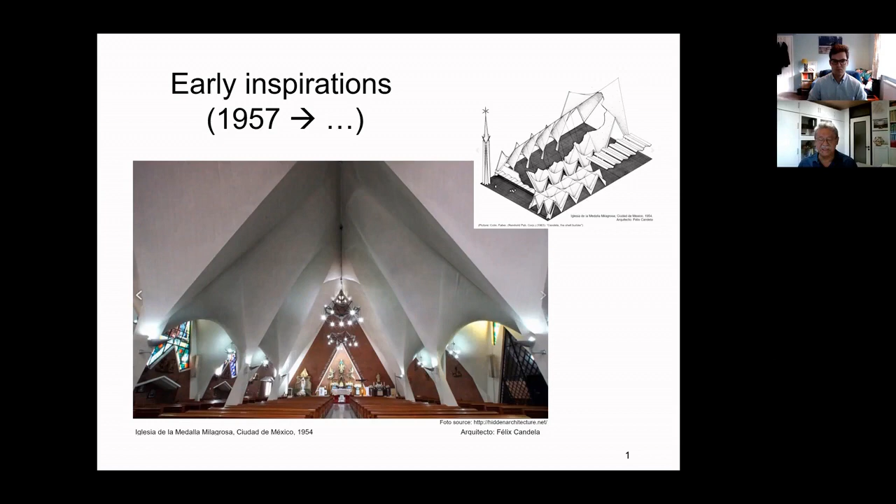Some 10 years later, I came across this book at the top right-hand side, the Wizard of the Dome, the Spanish version of the book about the geodesic domes of Buckminster Fuller. And that's when I decided I want to do this, I want to work on this area.

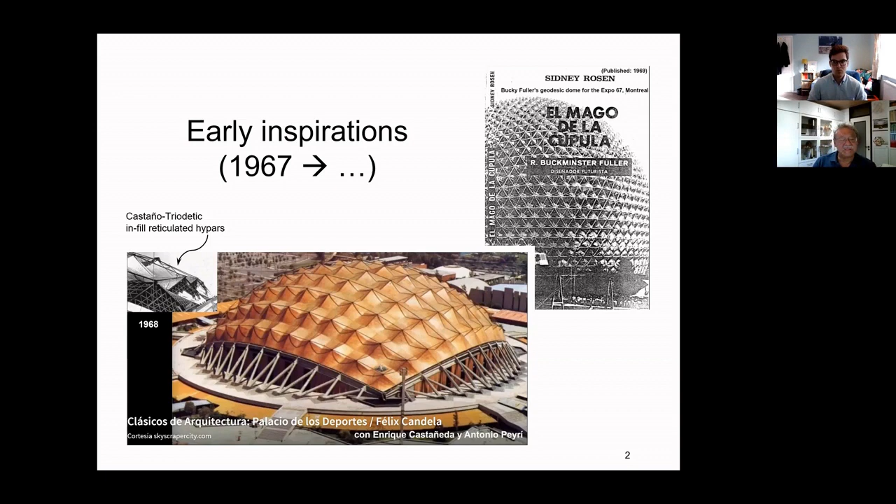More or less at the same time, this beautiful dome, designed by Felix Candela, Castañeda, and Peyri for the Olympic Games in Mexico, was also a very clean and splendid example of an advanced type of structure. It was a grillage of circular, double chord circular arches, and in between the infills were realized in this Castaño triodetic single layer reticulated hypars.

That's what decided my way into the architecture and design of these structures. I was very interested in geometry and shapes. I also wanted to learn about the engineering of it, but geometry is what pulled me into the field of architecture. That's when I would like to focus in this middle part of the interview on the geometry behind the spatial structures.

Being a geometry designer, I would almost say spatial structures are equal to geometry. Of course I know this is an oversimplification, and some engineers would say, what about structural analysis, what about materials and some other things? But I think one of the cores or the basis of any spatial structure is geometry. I will go through a short review of the geometry of spatial structures.

Here we have regular space structures, and many of these regular space structures have very simple normative principles, or principles of growing. For instance, MERO based some of his normed space structures on a geometric series based on the square root of 2, because that gave a lot of regularity and a lot of combinations having a minimum number of components. The picture at the bottom shows a pedestrian bridge built at the beginning of the 40s, built with normed components.

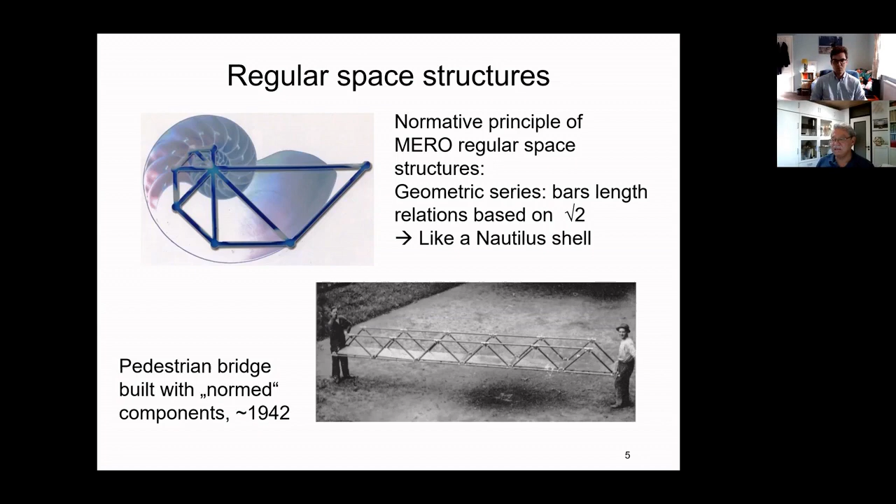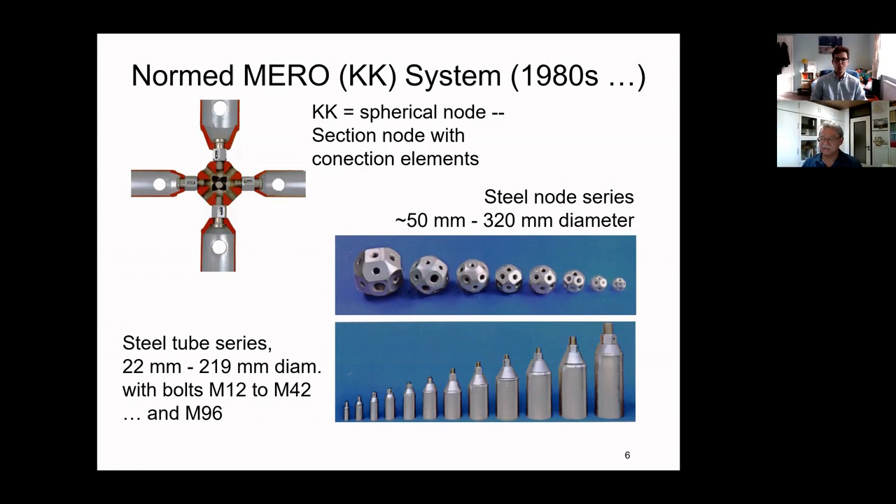From that time, and for the next 80 years, many people have been building space structures with these normed components. By the 1980s, this is the collection of components of the MERO system. There were very small nodes and also very big nodes, very small bars, very large sections, so you could combine it to design and generate small structures, middle-sized structures, and large structures.

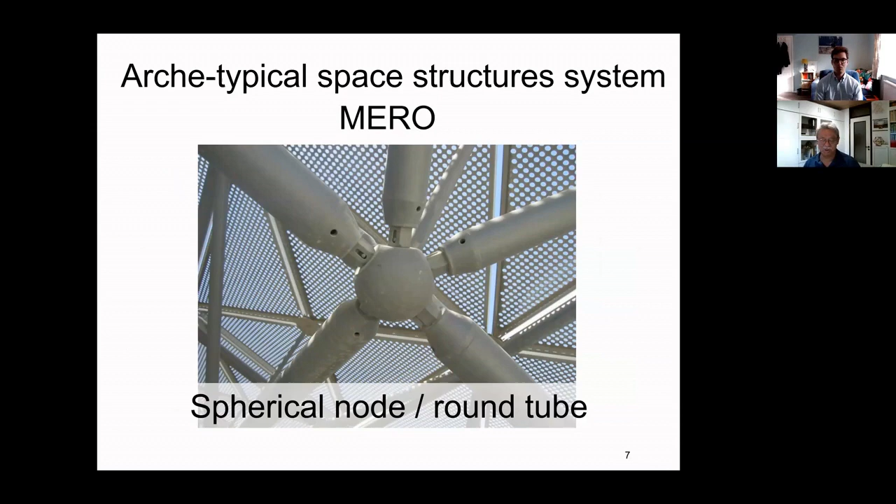If you connect these elements, they look like that. Many people are familiar with this type of connection of space structures. MERO is the archetypical space structure system. For many years there were many copies or clones of this system all around the world, the spherical node and the round tube. One characteristic of these regular space structures is that the angles at the nodes are fixed values, so they can be produced in series, and you can build and design many types of configurations.

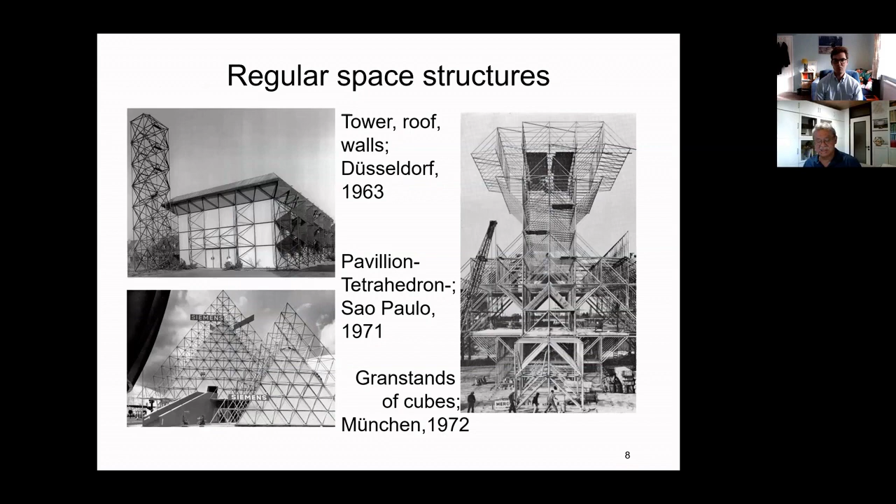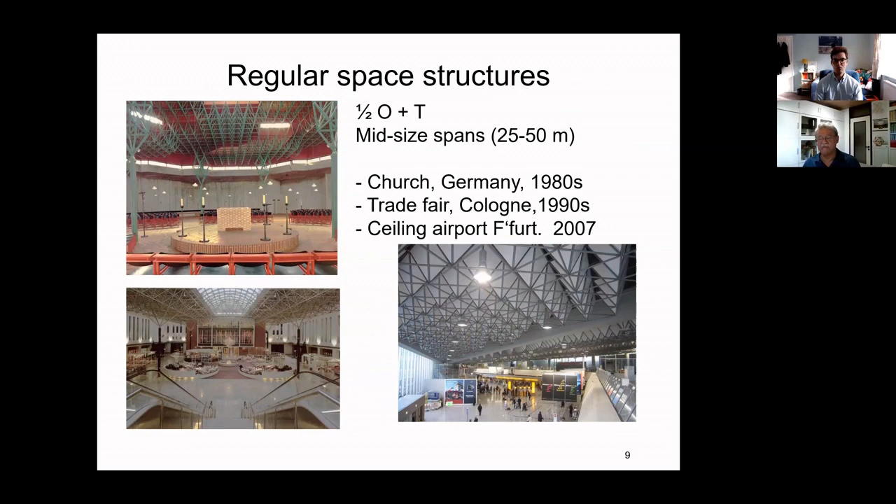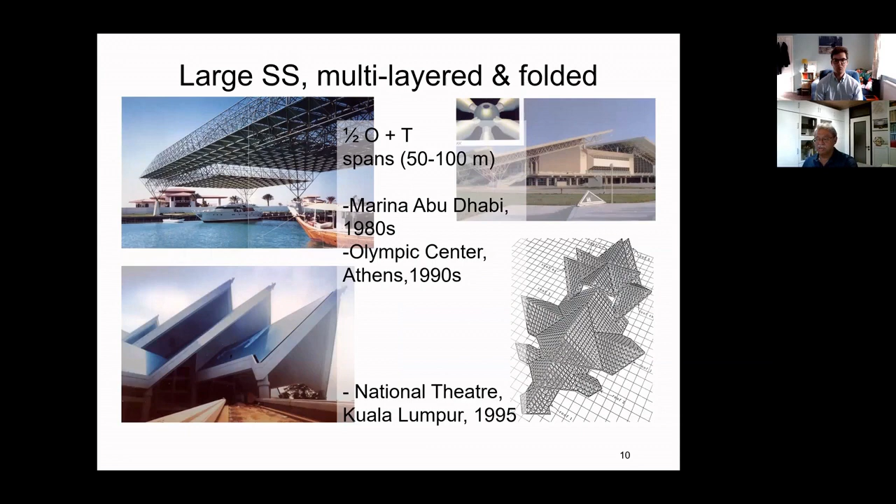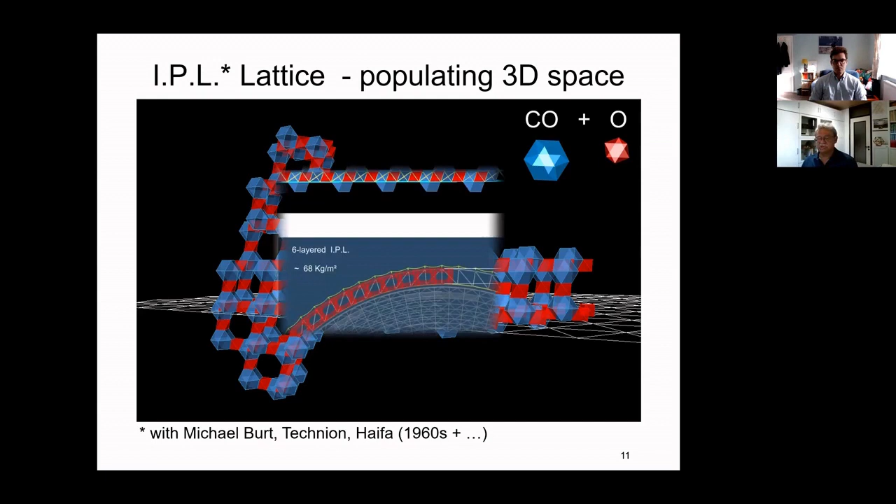Even looking into the future, populating 3D space with just a few components offers infinite possibilities of building interesting space configurations. This is an exercise we did in connection with Professor Michael Burt of the Technion in Haifa, who started his research in the 60s, and we also tried to apply his ideas for real structures.

In this case, we are taking a slice of this infinite polyhedral lattice, a 6-layer system, and making a comparison with a conventional steel truss system. From the difference in weights, here 102 and 68, only 68 kilograms per square meter, with a span of almost 300 meters, you see it's about 30% savings with this ultralight space structure configuration.

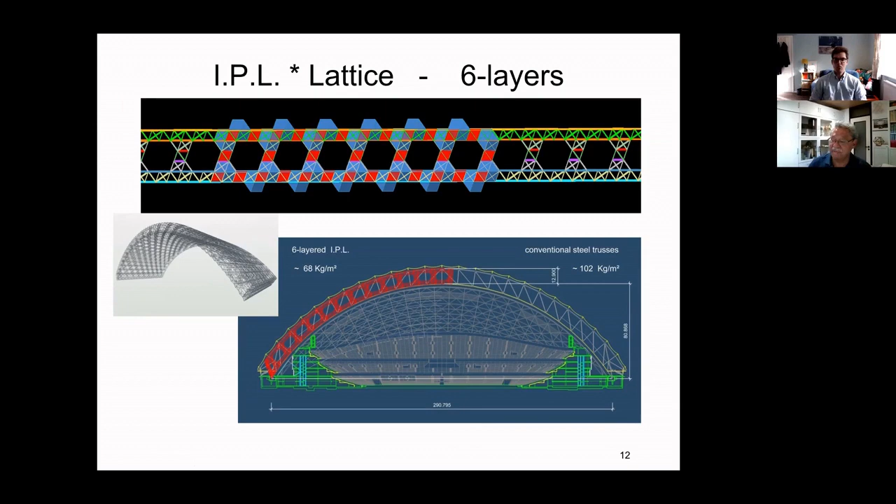And this is a very regular system. Summarizing the regular space structures, the more regular, the better. The target has been to obtain the minimum number of line lengths, node types, angle combinations at the nodes, and panel types.

On the left-hand side you see some well-known space structure configurations. In the top row, in the middle, you see the square on offset squares 2-layer grid. I mention this because I think more than 80% of the regular space structures in the world have been built with this geometry. Later you will see why.

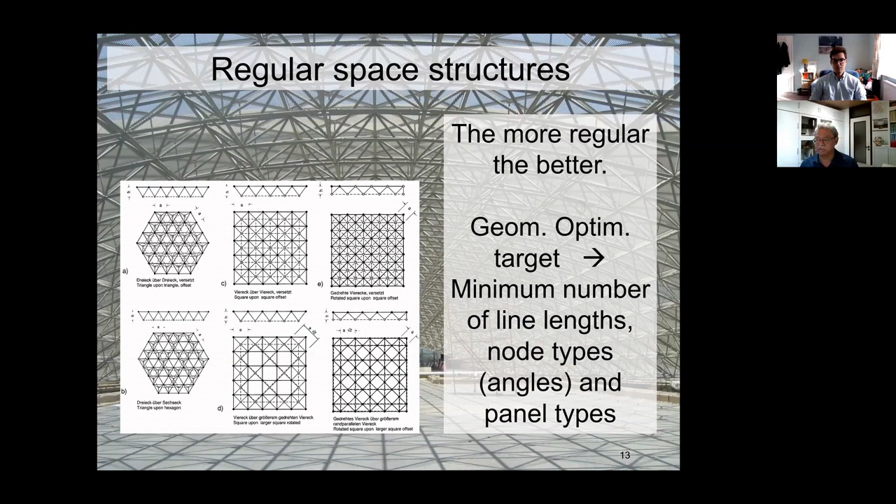By the end of the 70s, Mero had already automated greatly its production and technical processing. We were going parametric already, doing automatic dimensioning of tubes and nodes, including interference checks, parts list generation, generation of data sets for NC machining and drilling, and automatic generation of assembly drawings.

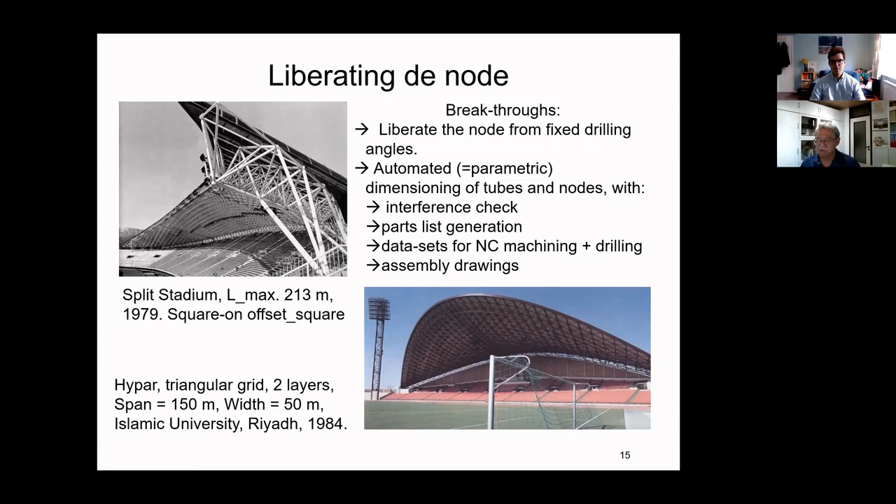And this is a breakthrough project: the split stadium from 1979 with 213 meters span. By the middle of the 80s, this kind of large, complex structures, as this hypar dome on the right from Felix Candela, were a matter of routine for Mero with the spherical node and round tube system.

With almost this system, Mero built a lot of domes. One of the outstanding domes, which you know very well in the UK, is the Eden Project in Cornwall. That was a Millennium project.

As you can see in the top picture, it consists of 2 sets of 4 interconnected geodesic domes. In this project, it was the first time that the hex-tri-hex grid was applied on an icosahedral system. The architect had designed the envelope of these domes with hexagonal networks.

But after a feasibility study, we found out, together with Anthony Hunt, the structural engineer, that the more efficient way of building these huge domes was a double layer system. We found a geometry that has this hexagonal grid on the surface and a semi-regular bottom chord layer of triangles and hexagons to stabilize the whole system.

The largest dome is very large, it's 120 meters in diameter. The largest hexagonal cushion has 70 square meters. That's like a dwelling almost.

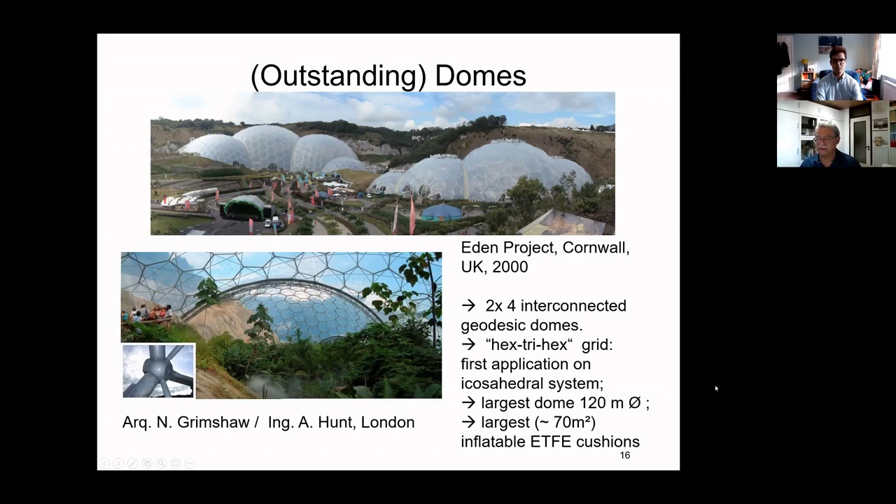Also, new requirements sometimes require new nodes, like the one here on the bottom left, and this provides more stiffness to the connection. Up to here, Mero had designed a lot of structures on spherical surfaces.

Most of them were analytical surfaces. But at this time, architects were also designing free-form surfaces.

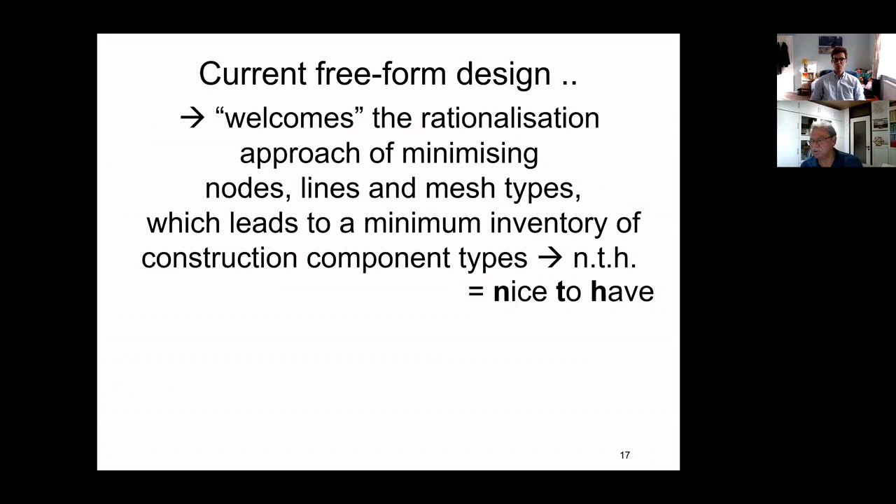Current free-form design welcomes the rationalization approach of minimizing node lines and mesh types. This is a feature which is nice to have, but not essential nowadays due to all the advances done in digitalization of design and production. But it's nice to have if you have just a few components.

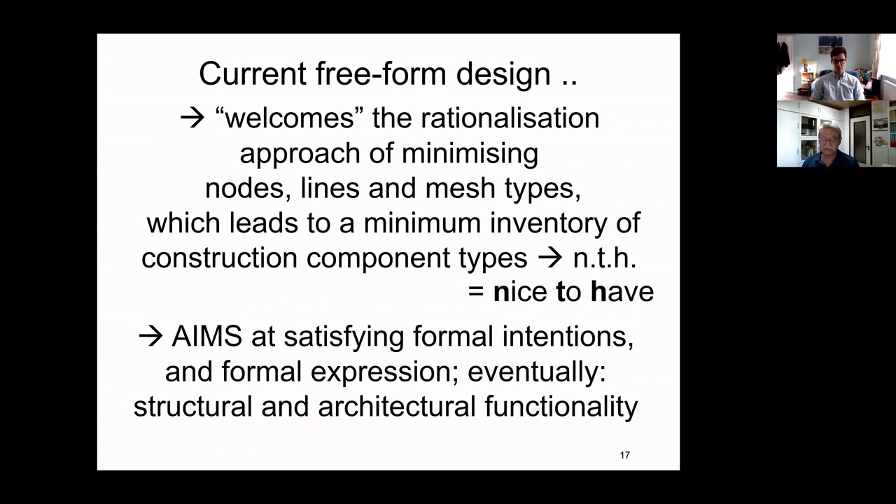Current freeform designs aim more at satisfying formal intentions, interesting forms, formal expression, and eventually also satisfy structural and architectural requirements. The next project is the Esplanade freeform hulls for the Art Center in Singapore.

That was the first very large freeform project for Mero. We were also trying to keep up with the technology and make the systems more elegant. Here above on the right-hand side, you see a view from the internal foyer.

And here is what the company needed to integrate the structure: the two-layer space frame with the glazing and the aluminum sunshades in one integral system for roofing.

Down on the left, you see the finished product. By the way, the length of these halls are about 120 meters, 60 meters wide, and 25 high.

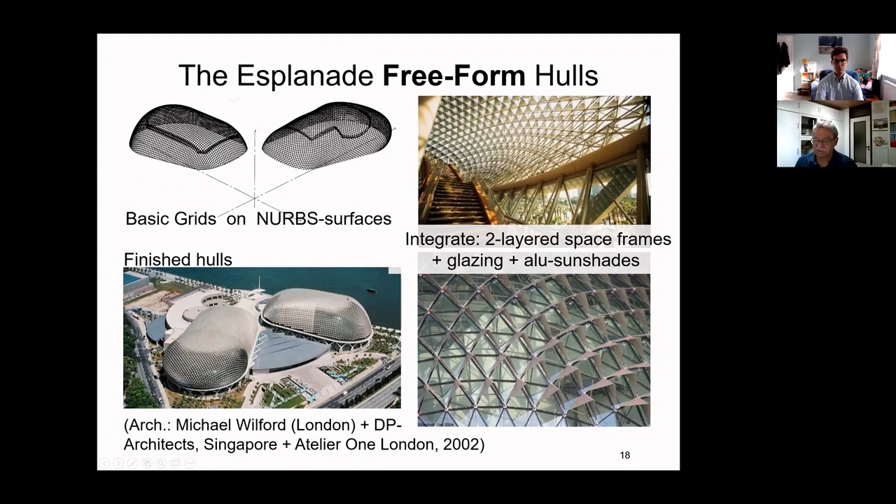Top on the left, you see our raw material. That's what the architects and the engineers gave us to develop the two-layer structural grid. At that time, we were also systematizing all possible features.

The systems were getting more and more complex and larger. So, for instance, in this case, we generated the whole bottom chord and the diagonals with a program based on the duality principle. On the right-hand side, you will see a mock-up of the resulting geometry. The basic grid had a constant length of 1.5 meters and a structural depth of 90 centimeters.

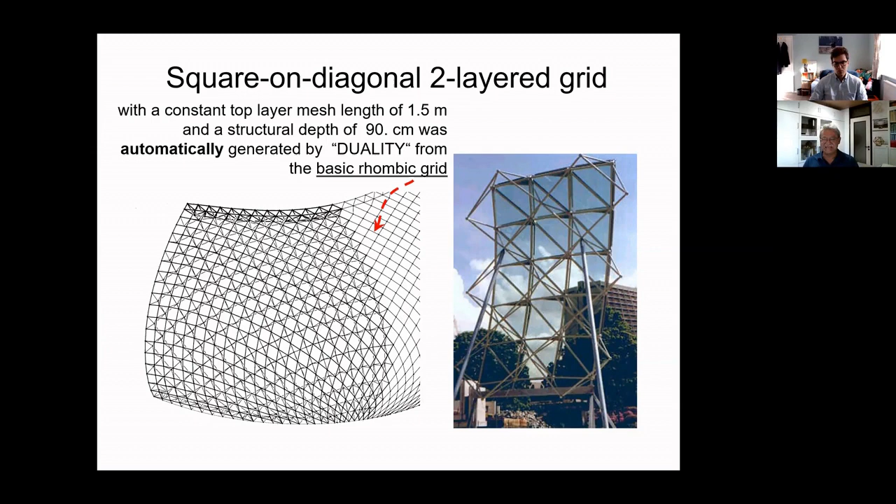At this stage of tools development, around the year 2000, we also started to extend the geometry model with other attributes, like point colors and point symbols. In this way, we could group the nodes of the surface of these halls and create this patchwork, which is a map of the pressure coefficients of wind for a certain wind direction.

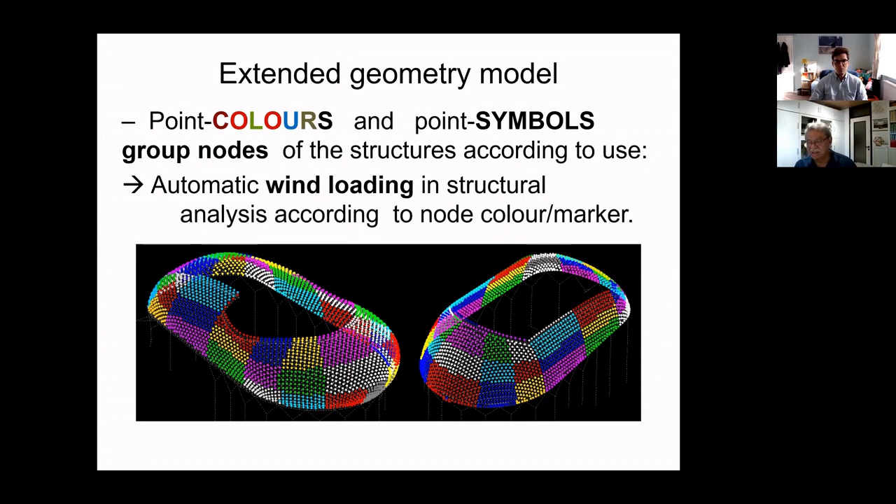With this approach, we could implement the automatic generation of wind loads for these two halls, for 12 wind directions, for every node, in an automatic way that fed the structural analysis program.

From the construction point of view, also around the year 2000, we started to use normal vectors at grid nodes, normal to the curved surface, and normal vectors at the middle of the lines, for the purpose of positioning and orienting the construction components.

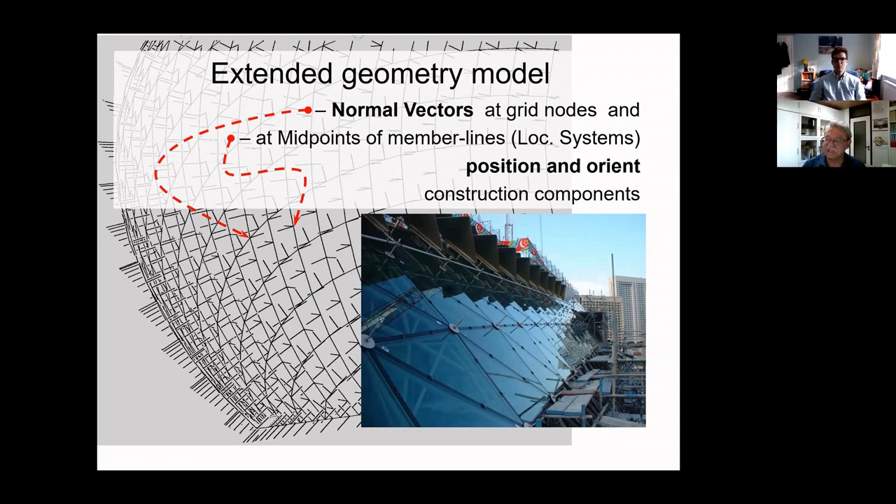In particular, normal vectors at the nodes were used to make offsets of the nodes to create the subsystems of the complete roofing system. The top chord was offset to generate the glazing grid, and with a further offset, the secondary grid for the sunshade substructure was generated. Nowadays, I think these are some sort of standard features to design and construct these free-form space structures.

Other designers were going another way. Here, Maximiliano Fuksas, in 2004, developed this free-form, very long structure, 1.3 kilometers, which for construction reasons had to be divided into 12 segments of about 80 to 100 meters, the width varying from 40 to 30 meters, and the height from 0 to 16 to 25 meters.

Almost half of the surface of this front surface is flat, so we had to re-engineer these flat surfaces to get low and high points, and the drainage was done at the low points.

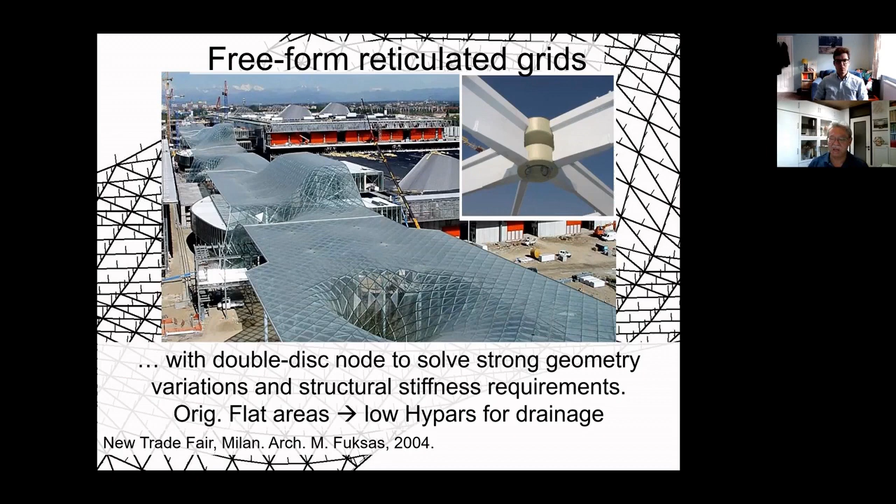Also, these flat areas require bending stiffness. The sections have to be high, so Mero developed this double-disc node to cope with this structural requirement.

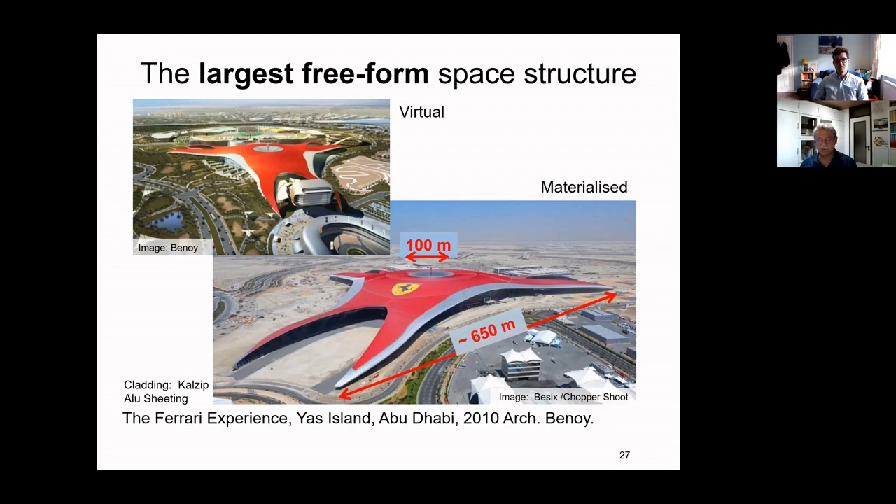Other architects were looking at the limits, how far or how big can a space structure be, and Benoy designed this extraordinarily large envelope for a leisure park in Abu Dhabi. Up, the virtual image of the architect, and down, the materialized roof. 100 meters, the hole in the middle; 650 meters, the distance between the two corners of this roof.

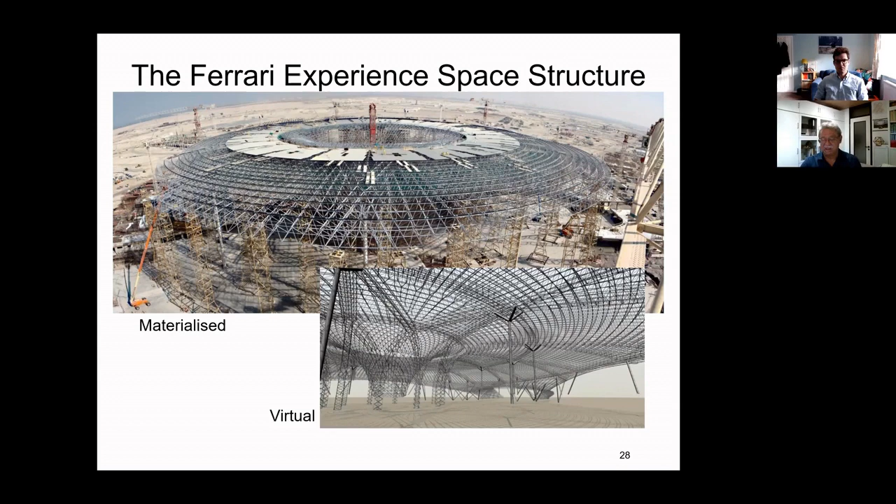We were always reaching the limits of many programs. Many programs had to be extended to cope with this huge amount of information, to be able to do the structural analysis and also to implement the construction. Even renderings, like this one, required many hours to be calculated.

There are some numbers, we'll skip them. I just want to show that the roof has 200,000 square meters of roof surface, more than 32,000 spherical nodes, and more than 125,000 round tubes. And the whole process of design up to the last stage of construction took only 1.5 years.

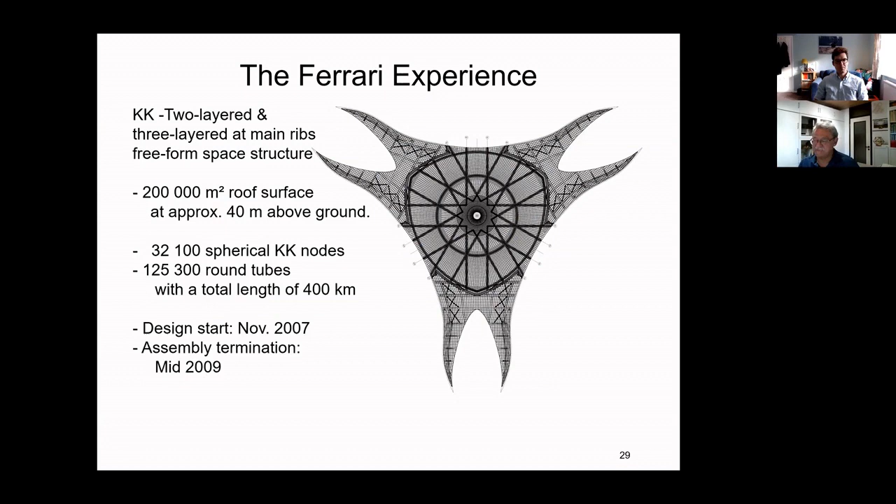One aspect that we hear nowadays concerning freeforms is the optimization of networks. But is it possible? Well, I'll make an oversimplification again: no, if the structure is going to be built, especially if you have a very strong interaction with other architectural elements, like in the case of this splendid design by Zaha Hadid.

One important requirement of this design was how the paths of the cladding seams, outside and inside, run parallel to a certain direction to suggest flow movement and smoothness.

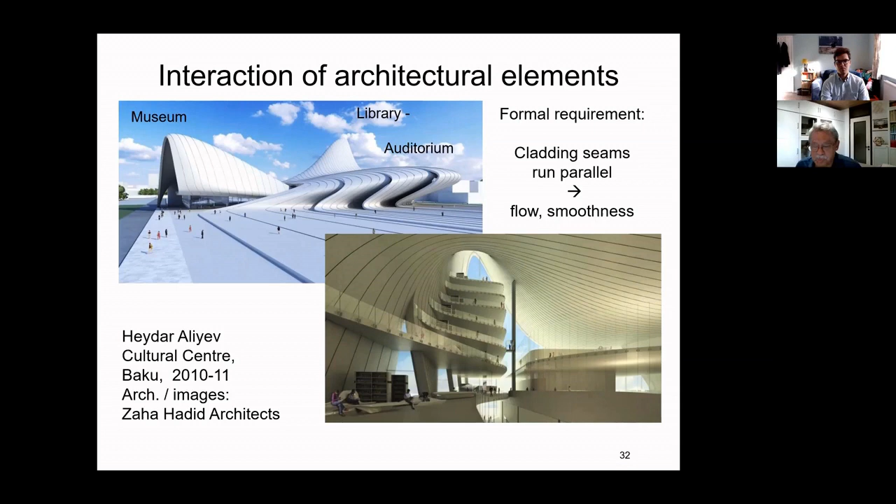But how do you support these skins? There was, of course, a period of evaluating structural systems, and at the end, the space structural system—especially this geometry, square and offset square, in combination with spherical nodes and a tubular system—won this competition. It was because this geometry, with this type of connection, allows you to approximate almost any geometric shape.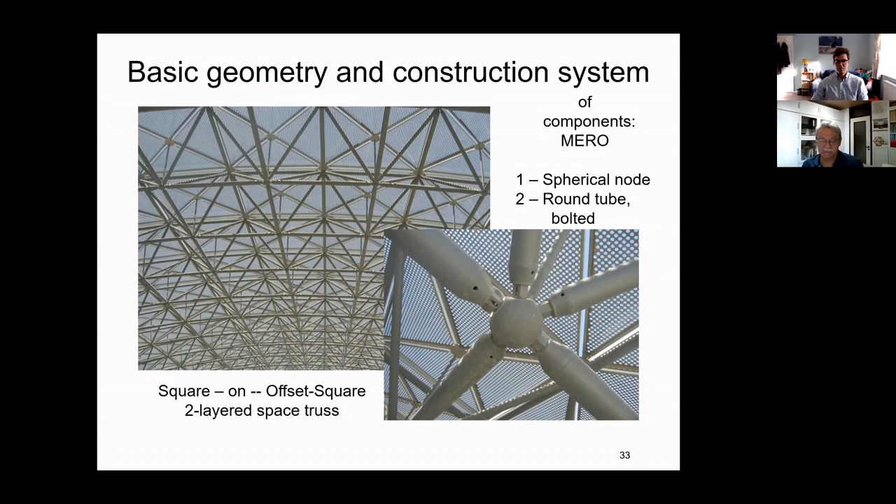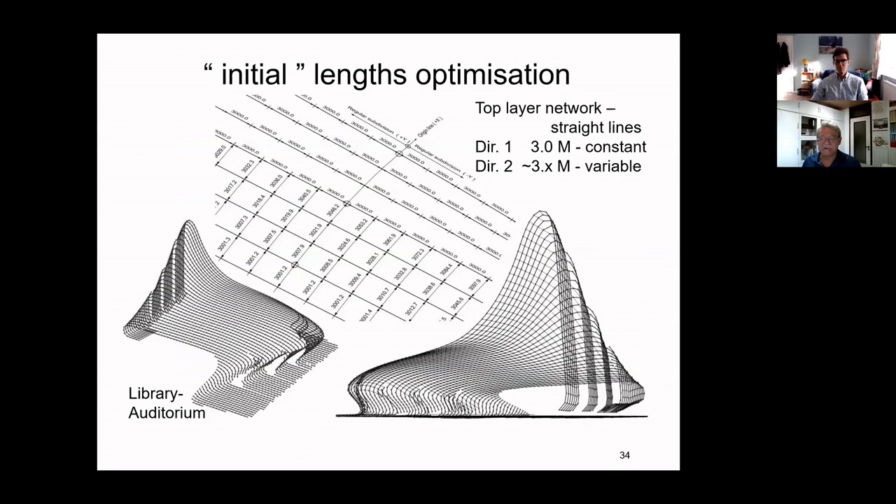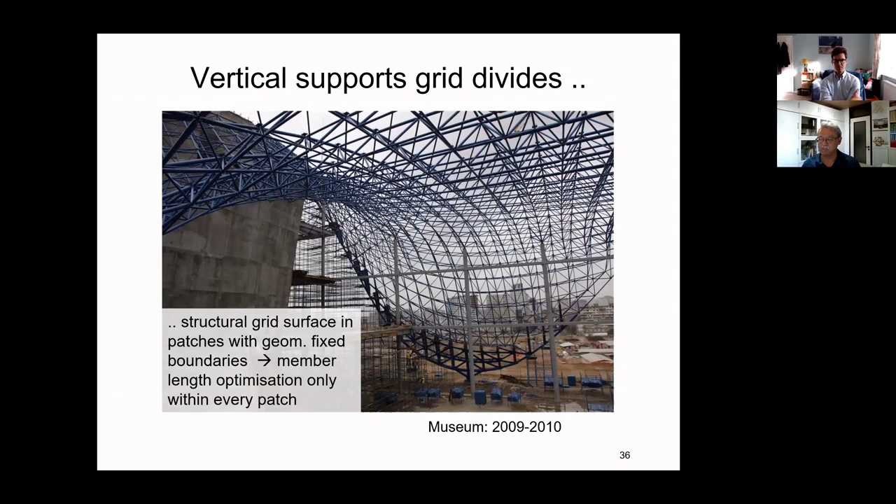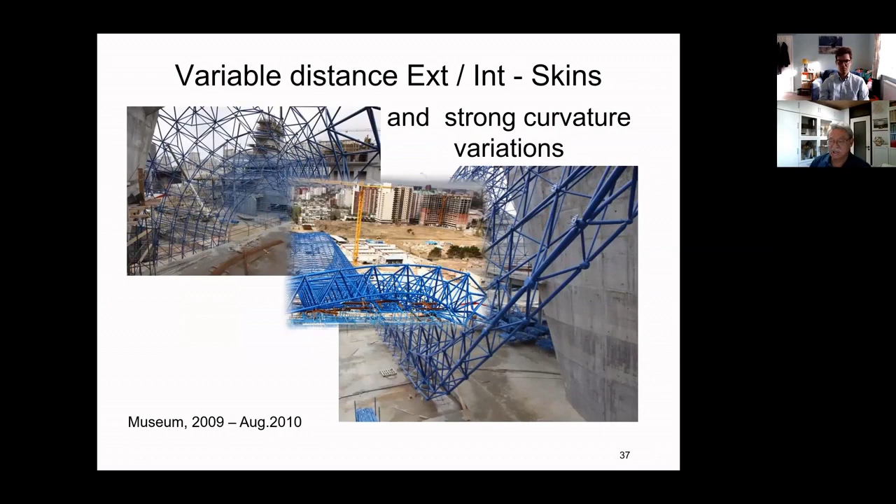We have an initial length optimization. I won't go into the details, because we couldn't apply it to the whole surface, since the structural grid of the columns inside had another module and divided the surface into patches. So we could only apply our optimization strategy within these smaller patches, which was a bit more work. Also, the variable distance between external and internal skins and the strong curvature variations didn't allow us to minimize the types of nodes. It was really impossible.

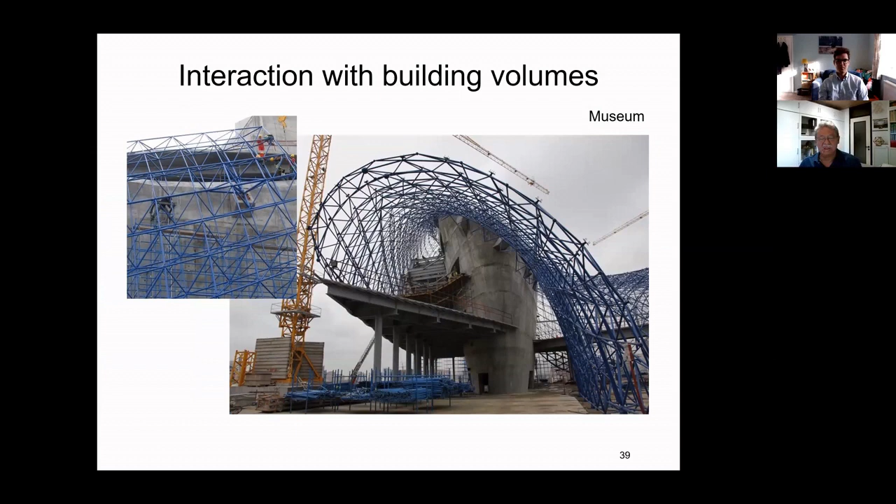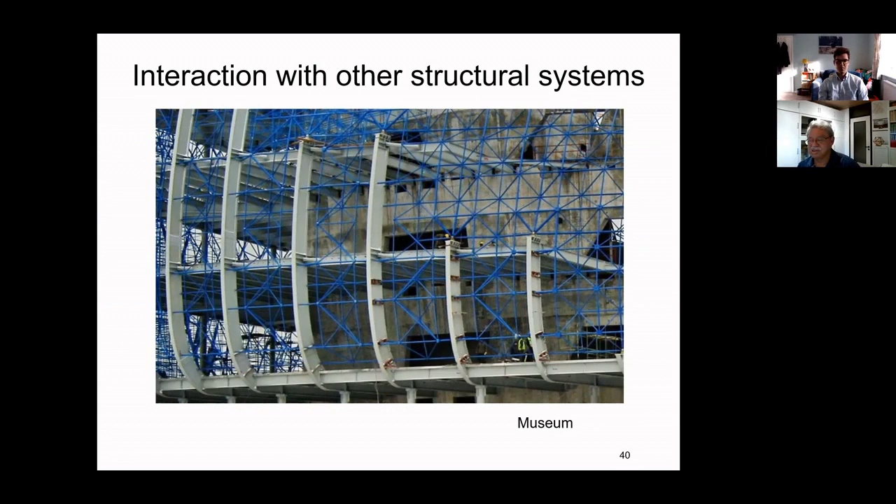The interaction with building volumes, like supports positions in the top, in the lower core, they force you to come with your polylines also going through these fixed points. Also interaction with other structural systems. We were happy that we could weave in between these supports to be able to guarantee the support for the cladding.

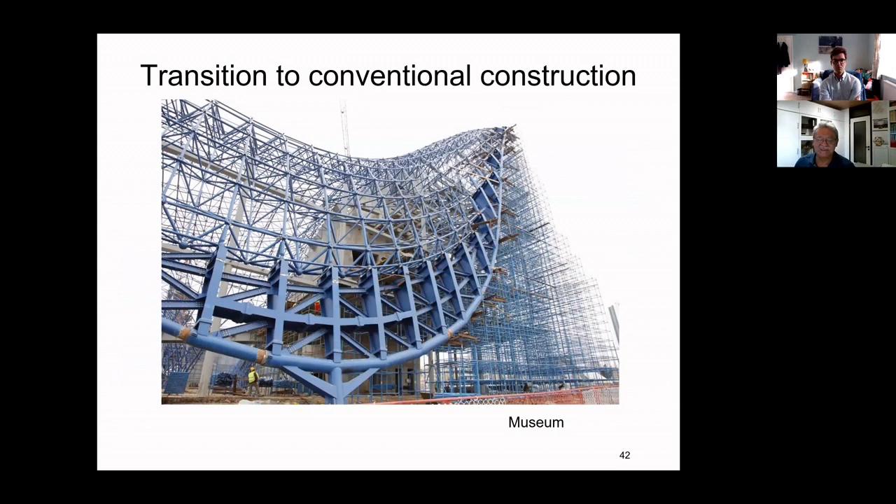Also the transition to conventional construction when the space frame system couldn't be applied anymore. Also like in this part of the museum where this point at the bottom is supposed to touch the floor tangentially. But it's a very massive tangential point because it's a support point where very heavy earthquake loads had to be taken, also wind loads.

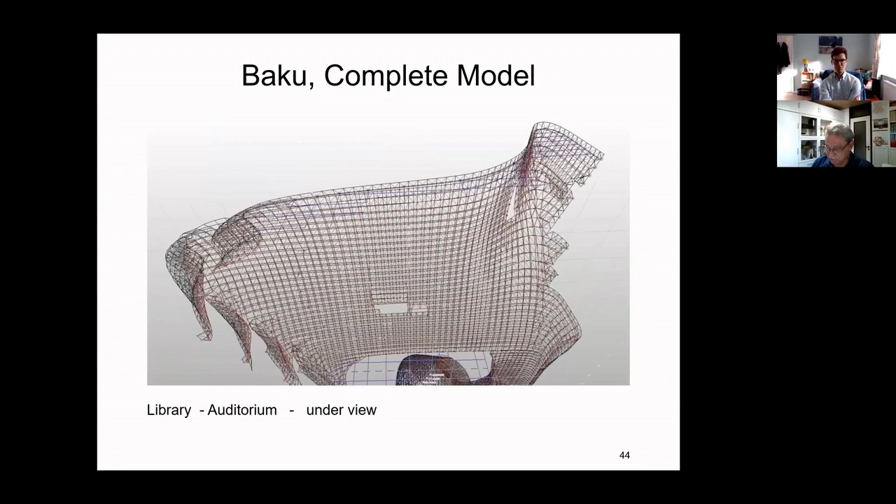So there was a certain little contradiction with the architectural design. In the end, we had a complete model of this splendid design, and that was the basis for the structural analysis, the construction detailing, and planning the erection of it. And you see it worked because this is a photograph of the real space structure.

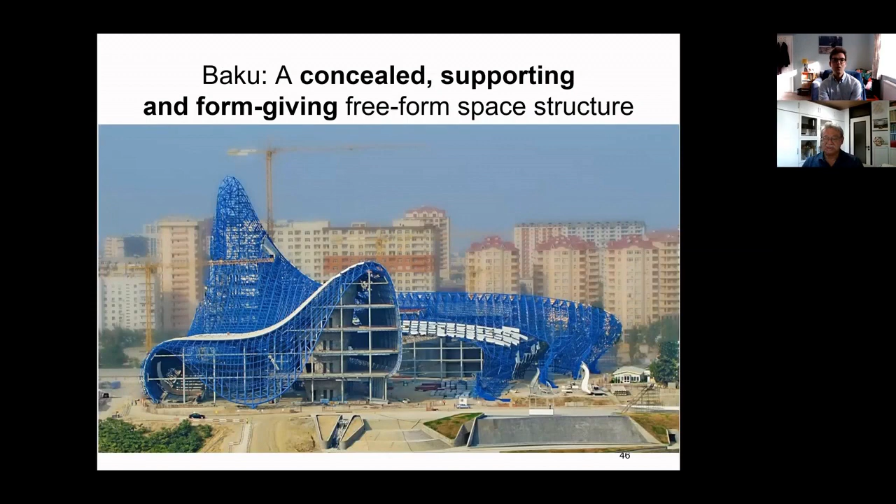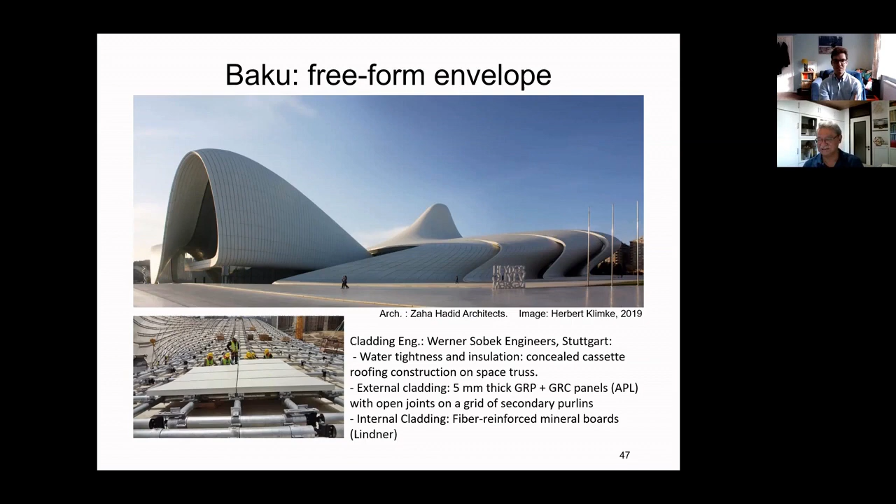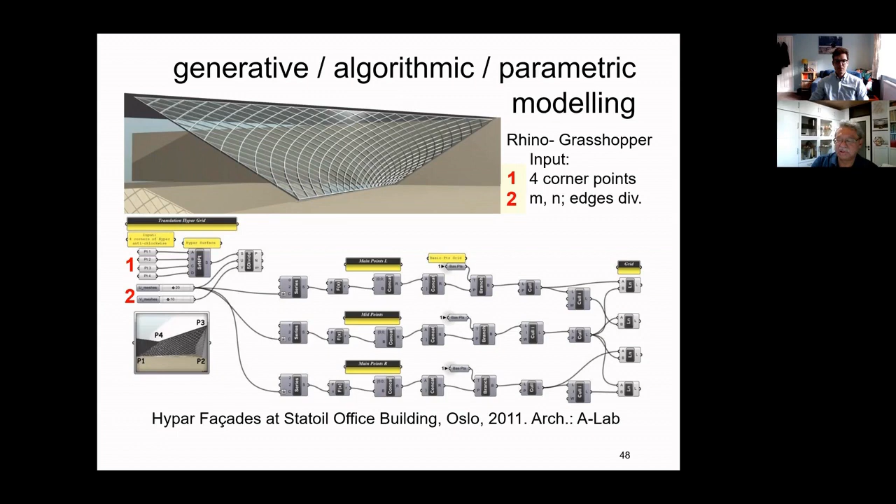That's an addition to Rhino, which is a program for modeling and designing free forms. In this case, you only give four points in the model space and the subdivision numbers in the two directions, and it delivers you this structure.

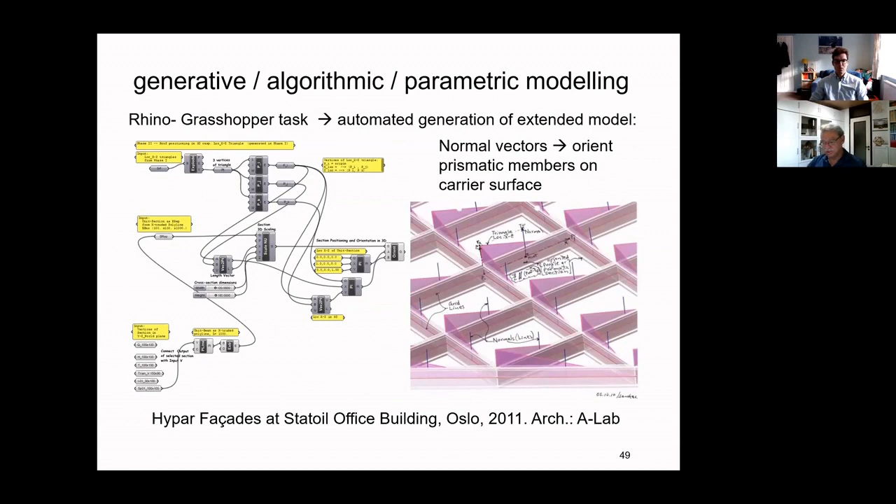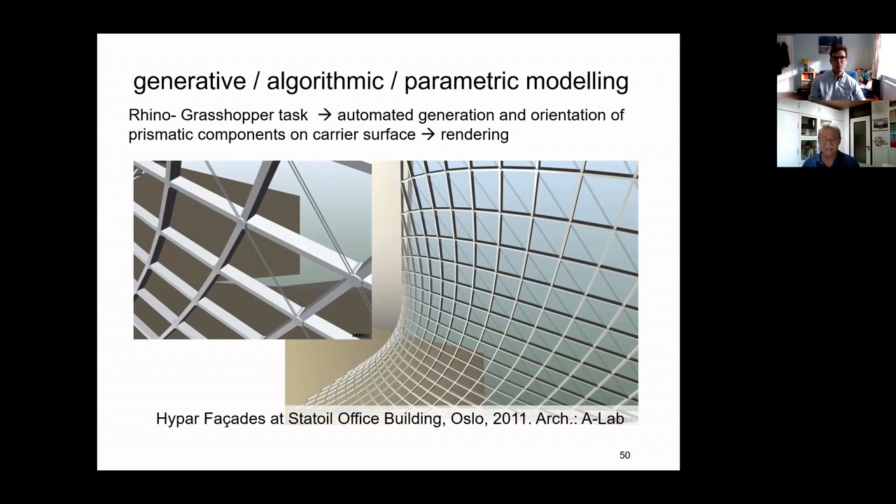We extended this grasshopper formulation to generate the sections oriented properly to the surface. And so in the form finding stage, we could generate very quickly how the structure could be seen. But in the end, this is the resultant structure.

And here one word about geometry rationalization. The initial surface of the facades were minimal surfaces, but the panels were not flat. And the architect wanted to cover it with flat panels of glass.

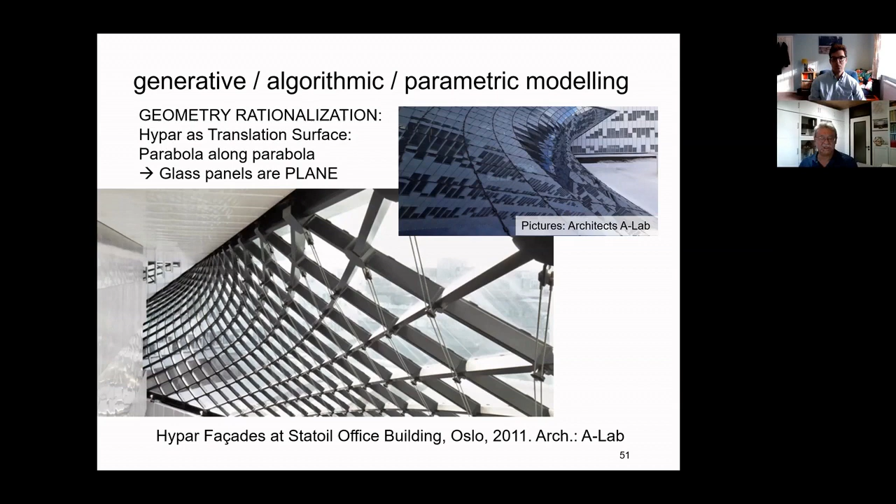So we were lucky, we compared this minimal surface with a translation surface generated as a hypar—generated as a translation surface. It was very, very close to the original design. So we replaced it, and in the end we got glass panels which are completely planar.

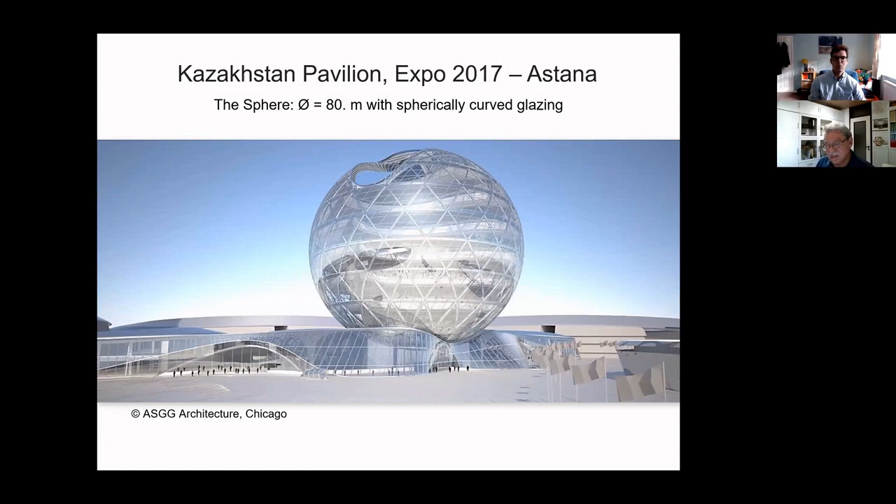And my last example here is the Kazakhstan pavilion for the Expo 2017 in Astana. That's a sphere of 80 meters in diameter with spherically curved glazing.

This is the geometry definition from the architect. He took a sinusoidal meridian and rotated it 80 times about the sphere's vertical axis to generate the glazing grid. And that was the definition.

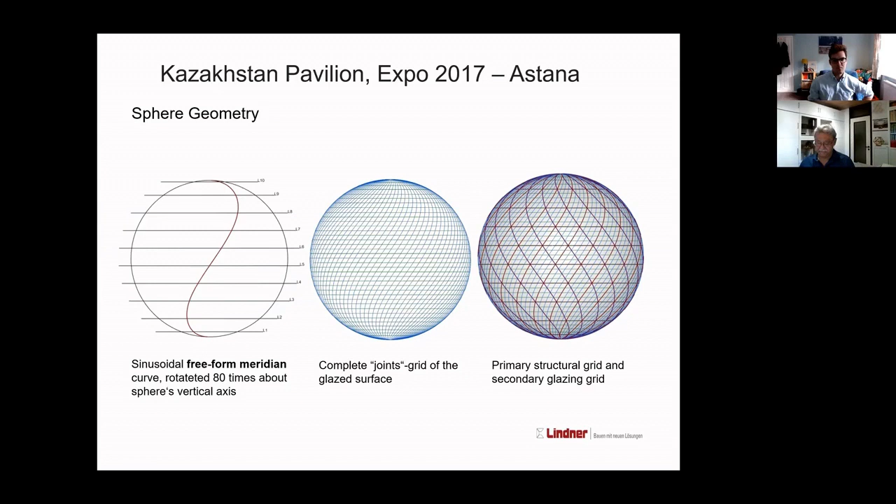But for construction and economic purposes and fabricational purposes, we had to rationalize or simplify this geometry for production. What we did, we divided the freeform meridian into segments, more or less every 9 meters at every floor.

We took the two end points of a segment and the middle point, and with this we define an arc, a circular segment. The great advantage of this is that the secondary structure is built with round tubes which are bended, and it's much easier to bend a line with a constant circle on a plane precisely.

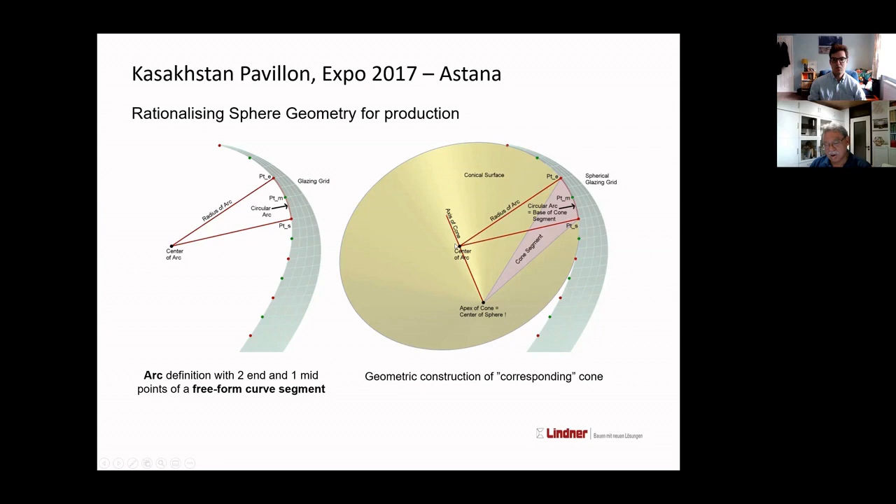We played a little bit around with the form, and from the center, perpendicular to the base of the cone, we extended the line and we met the sphere's center. And we proved that, we tested that for the other segments, and all the cones' axes landed in the center of the sphere. And that had a very nice consequence.

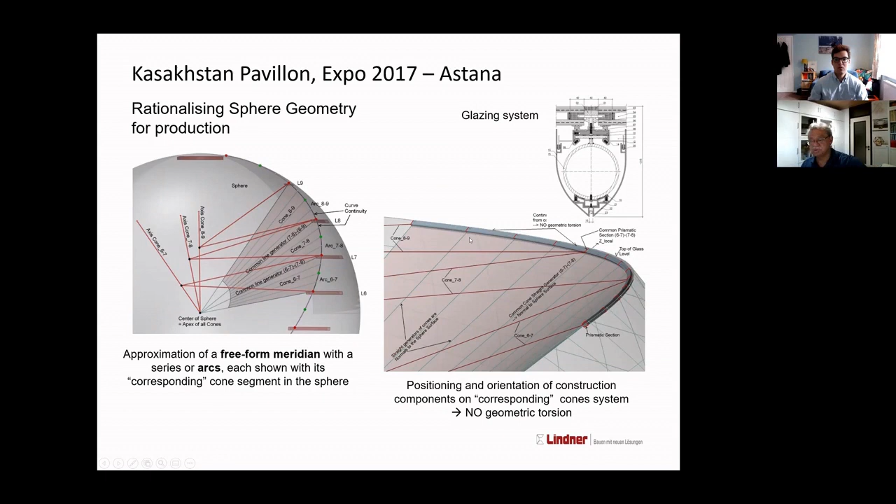All these conical segments, which are neighbors, have a tangential condition at the common line in between. And the consequence for the construction, when you have a multi-layer system of glass and secondary structures and fixings, is that every edge of this section, when it goes from cone to cone, there's no jump in between. All these lines go continuously from bottom to top with no torsion, jumps, or twists. And that was a great gain, a great simplification for the construction.

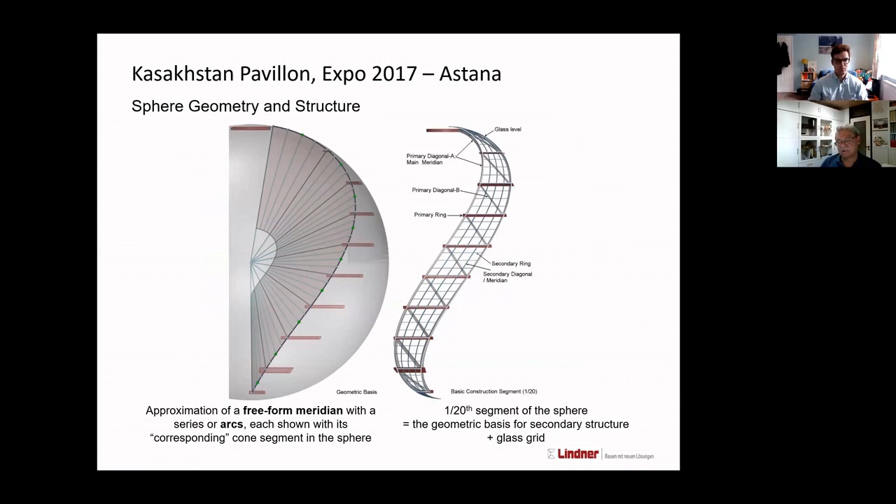Special structures, equal geometry, okay? So I'm back again.